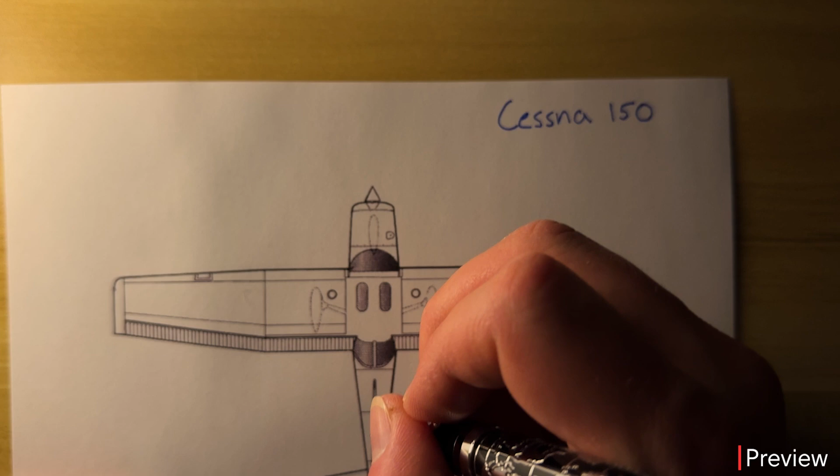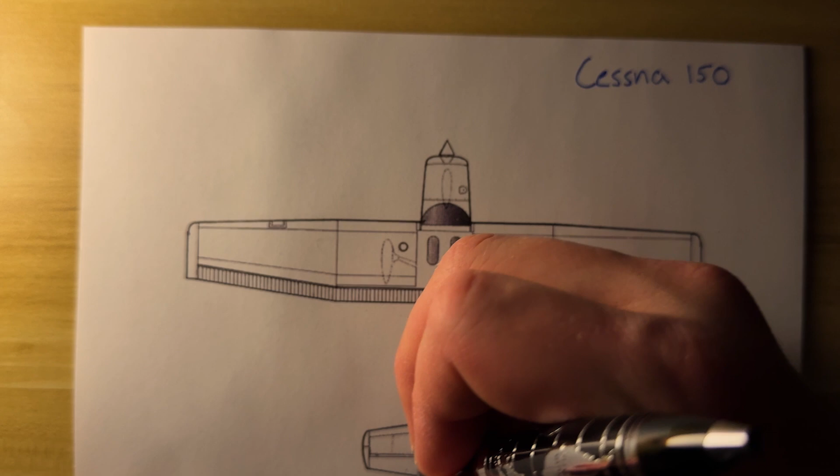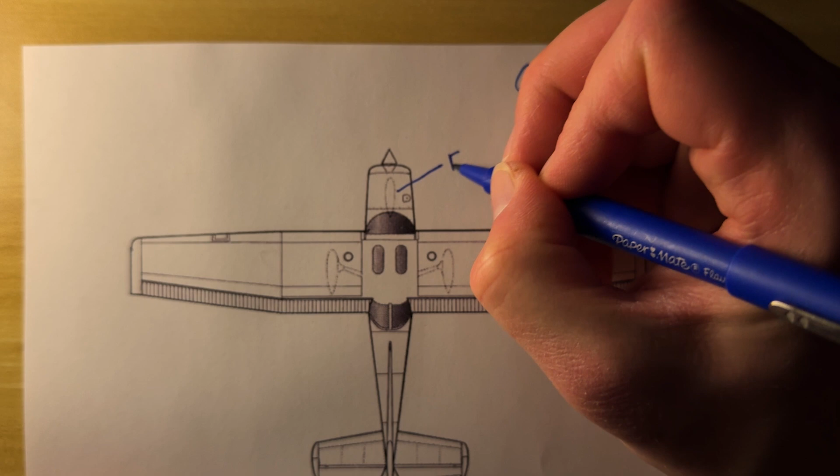So why don't we start labeling some of the main components of this plane right here. Okay, so starting from the top here. So the engine is going to be inside of this compartment right here. You press this little lever down and it will open it up.

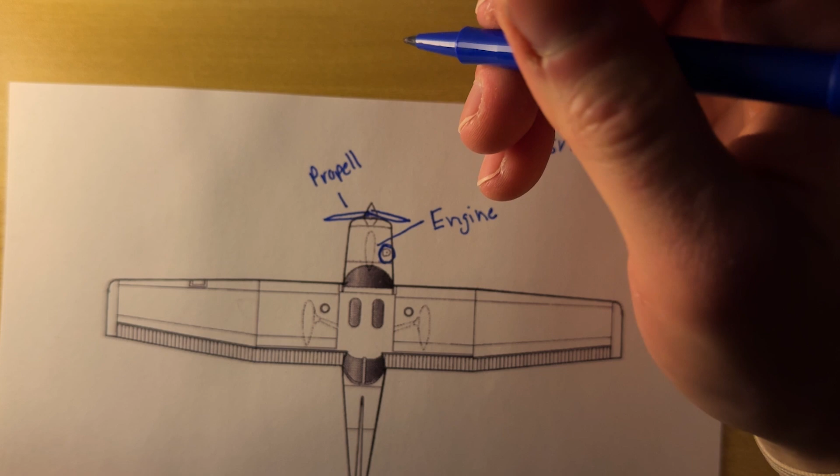And then you have the propeller, which would be on this kind of nose cone right here. So right here, you have the propeller, and I need to make sure that I don't spell anything wrong, because that would be a little embarrassing, not gonna lie. So you have the engine and the propeller.

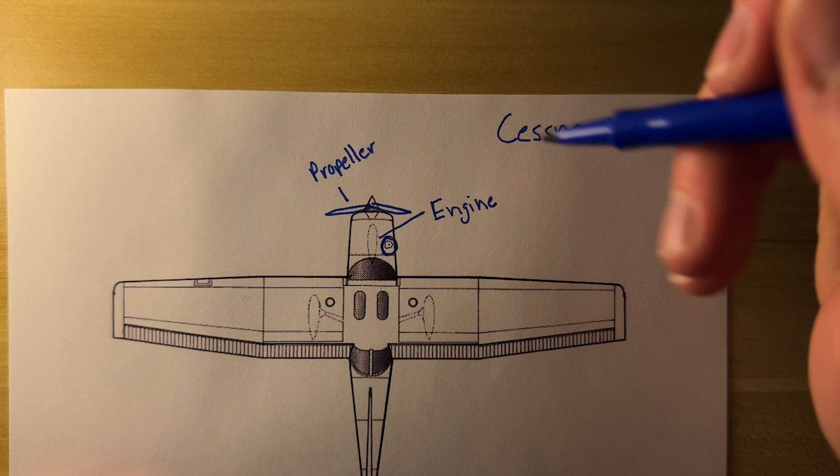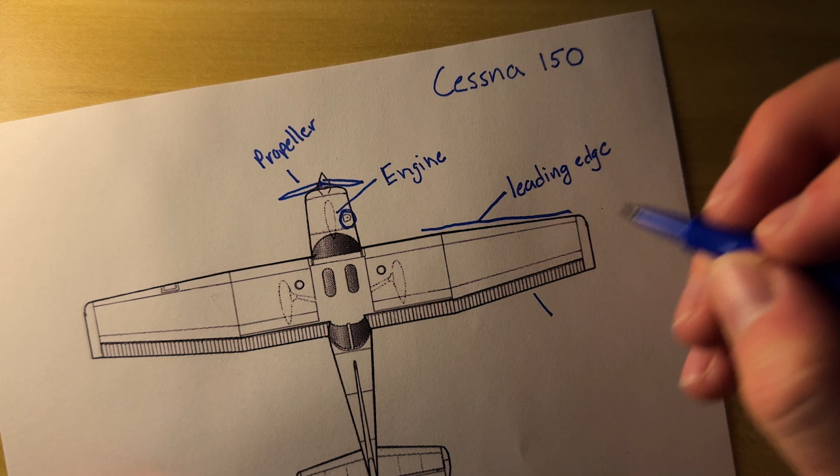And then obviously here are the wings. So you have the leading edge of the wing, which is this front part, that's what it's called. And then on the side here, you're going to have your aileron, A-I-L-E-R-O-N. And this is going to control your side-to-side movement.

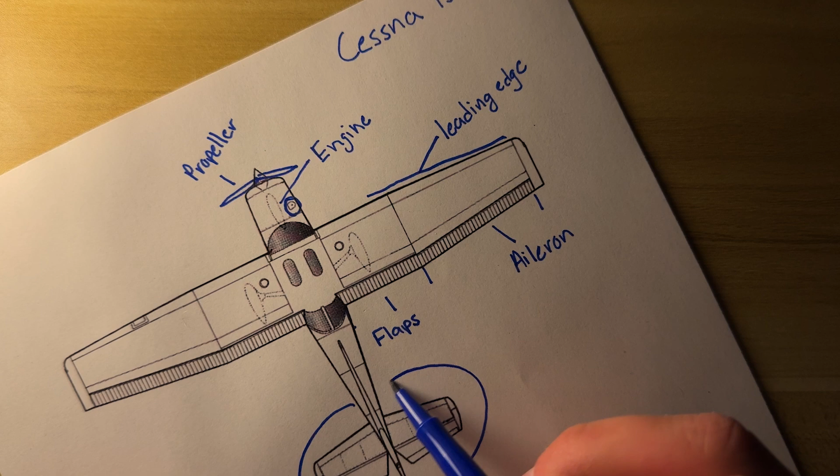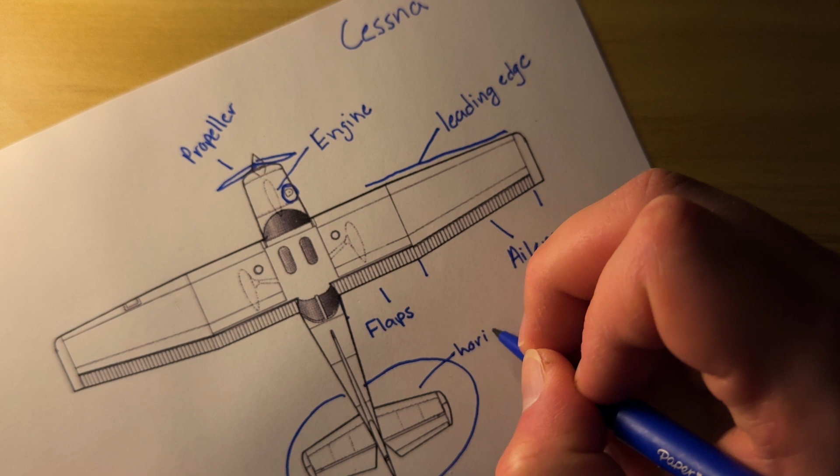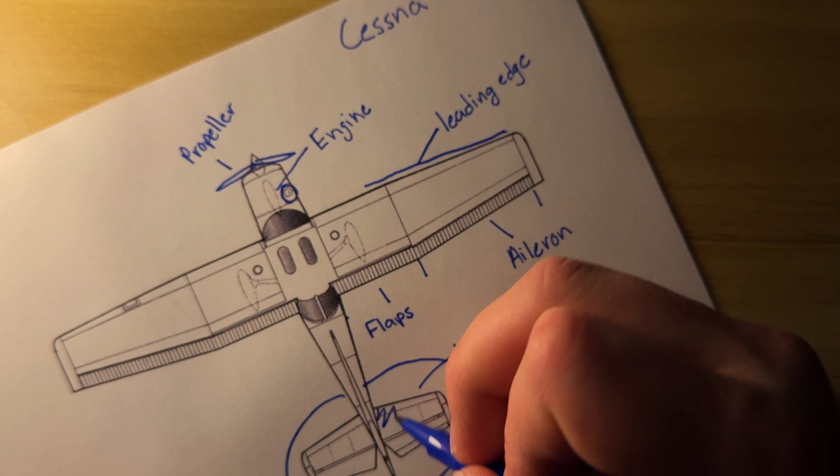And then, so that ends about there. And then right here, you're going to have your flaps. And then at the back here, this part of the assembly. So this part of the assembly is you have the horizontal stabilizer. There's this part right here. And then you have your elevator.

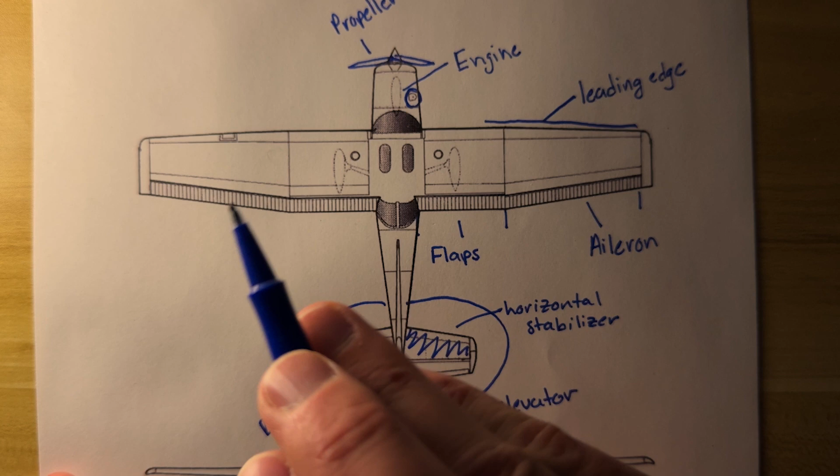Right here, and this controls your pitch, and then it's hard to see right here, but right here is your rudder, R-U-D-D-E-R, and this controls your yaw. Just side to side.

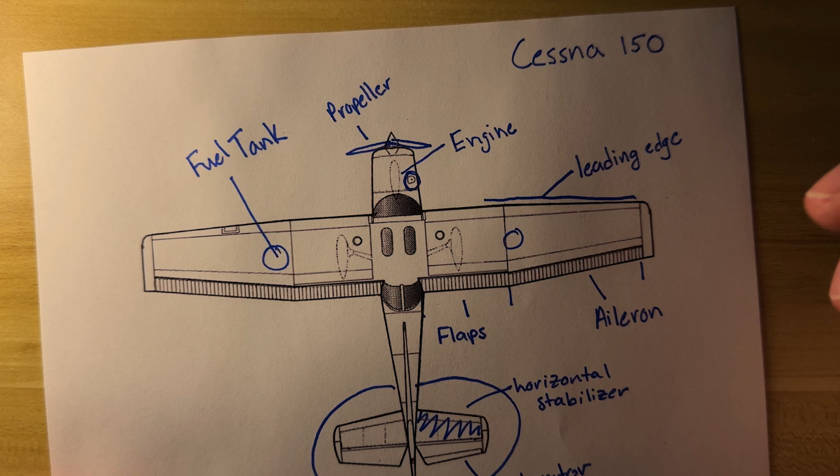Now, the fuel tanks are actually in the wings right here. Fuel tank. So you have one in each side of the wing here. And if I remember correctly, each side holds about 20 gallons. So you have about 40 gallons of fuel here. So from this view, that's about all that we can see.

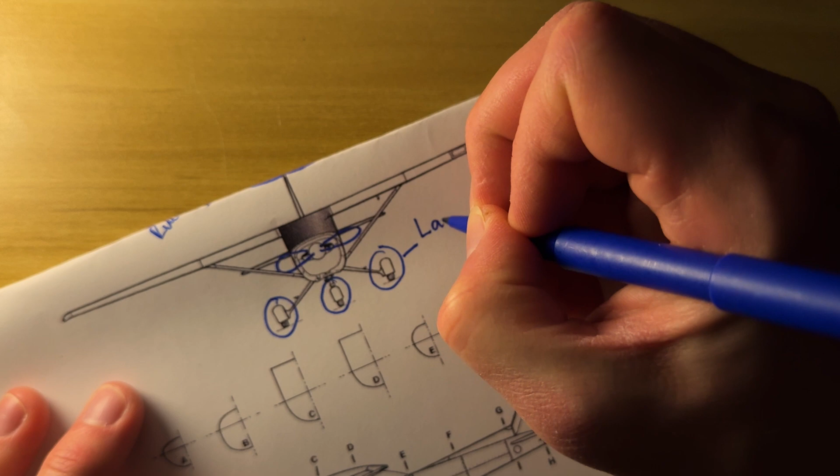Let me just fold this guy up so we have a better view of the other diagram. So here is your side view and your front view. So you have your propellers right here. And then the Cessna 150 has this tricycle gear design. So these are your landing gear. Let's see, and then you have these supports right here that help give stability to the wing.

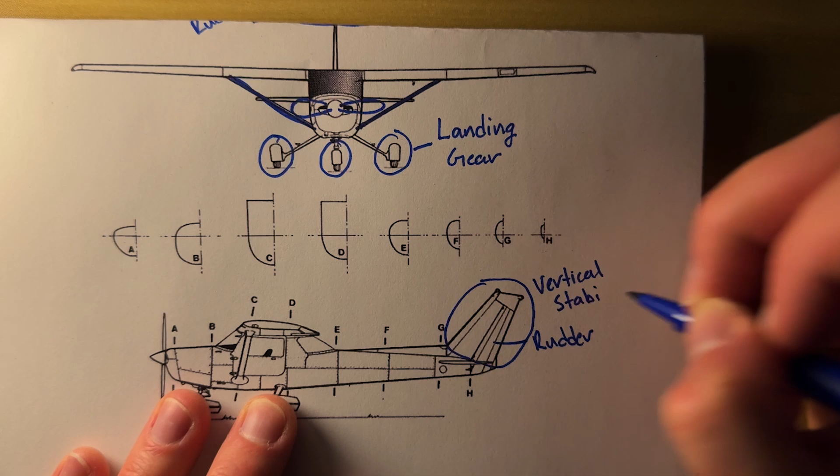And then down here is a side view, so here was a rudder. And this whole assembly right here is the vertical stabilizer. Let's see. And then the main body of the aircraft is the fuselage. I need to make sure I don't spell this wrong. Fuselage. I was definitely going to spell that wrong. So it's fuselage.

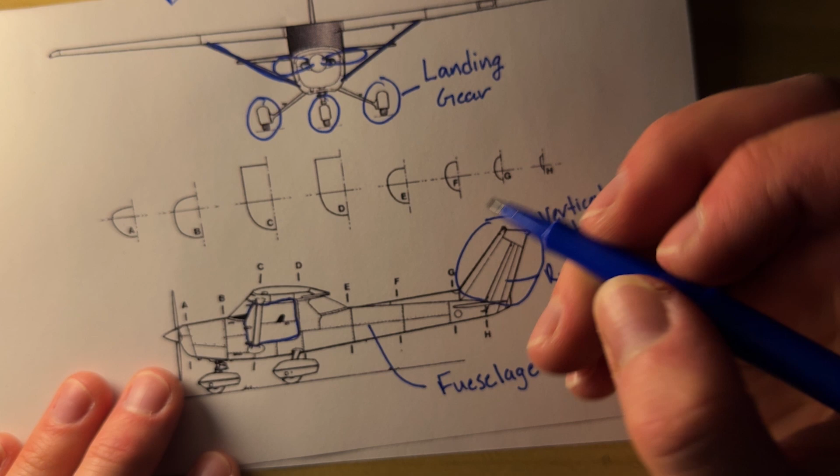So here's a door. Here's a door. Usually there's a little cargo compartment back here, at least on the Cessna 172, where you can put your luggage or whatever else you need back there. Let's see. So yeah, that is the basics of the Cessna 170 or 150.

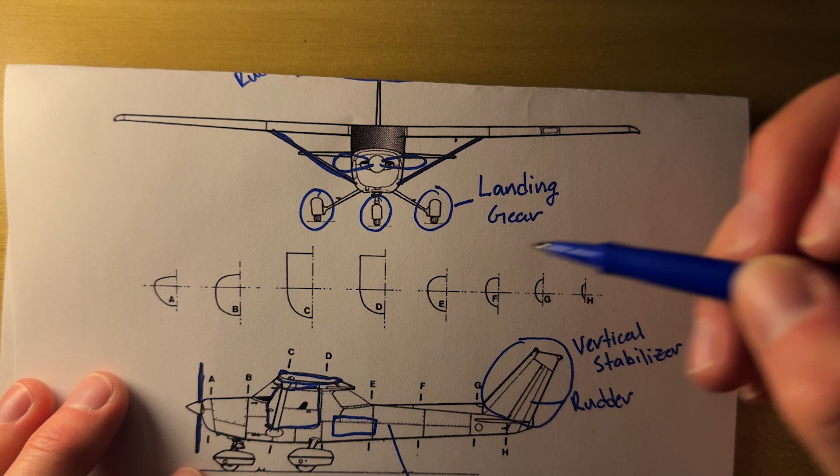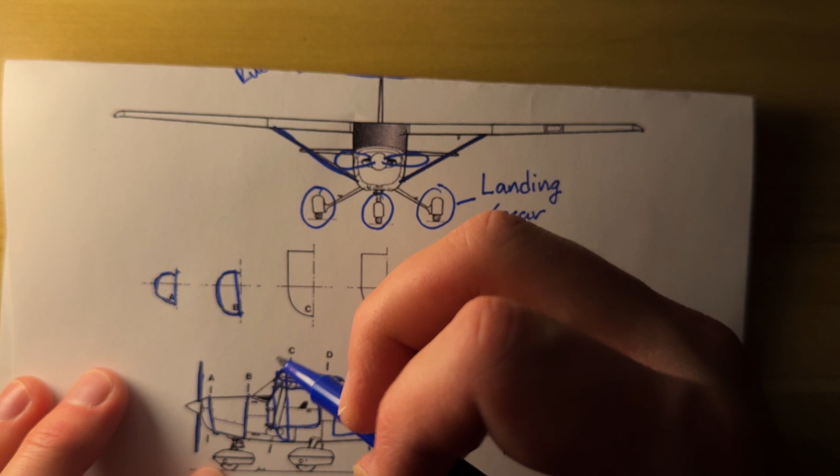And then it looks like right here, whatever this cross section is, it's a cross section of this. So point A looks like this. Point B is a little bit bigger. Then you have point C, which starts going into the cockpit. Point D is kind of like the back seat. And then you get to point E, and that's going to the tail of the aircraft. So the cross sections start getting smaller and smaller.

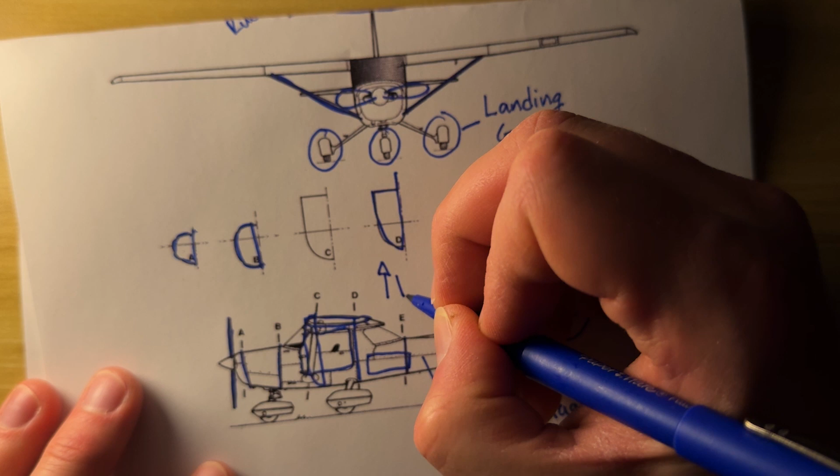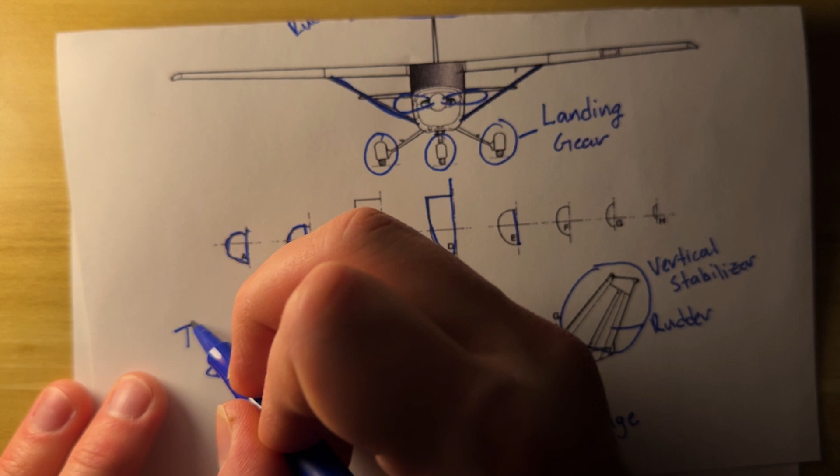So, if we keep looking at this diagram, we can tell the four forces of flight. So, you have your upwards force, which is your lift. Then you have a downwards force, which is your weight. You have a forwards force, which is your thrust. And then you have a backwards force, which is your drag.

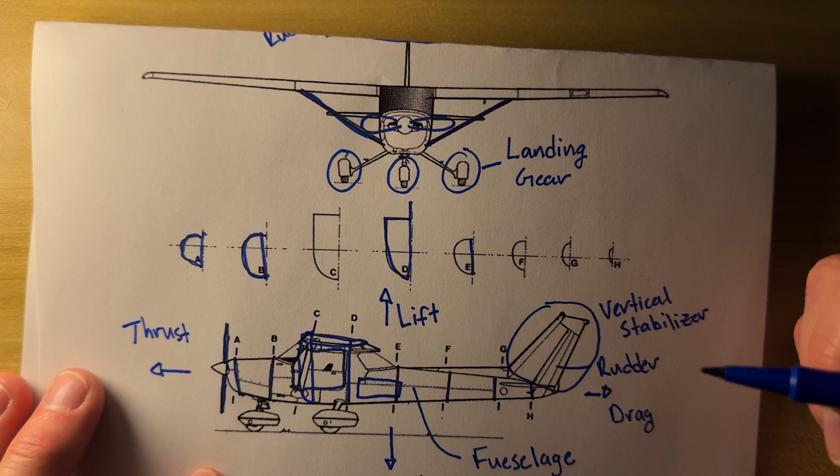Now, in order for this plane to fly, all of these forces must be in equilibrium, or your thrust and lift have to outweigh your weight and drag. So, your force is going to be generated by the engine, which then turns the propeller, giving you thrust.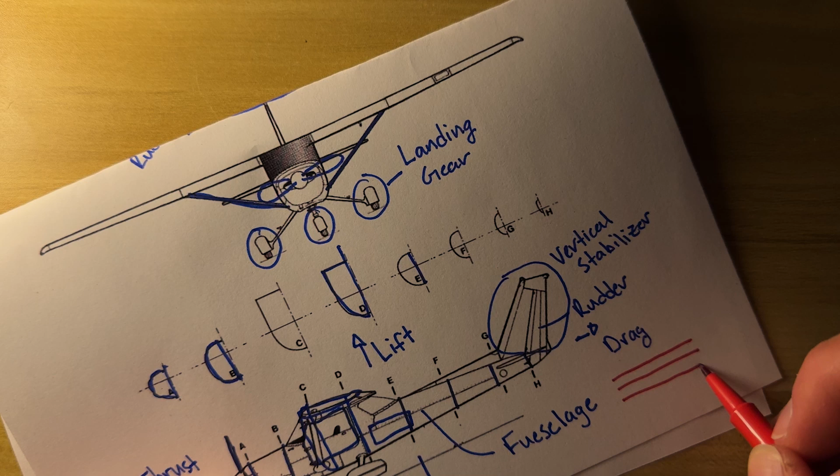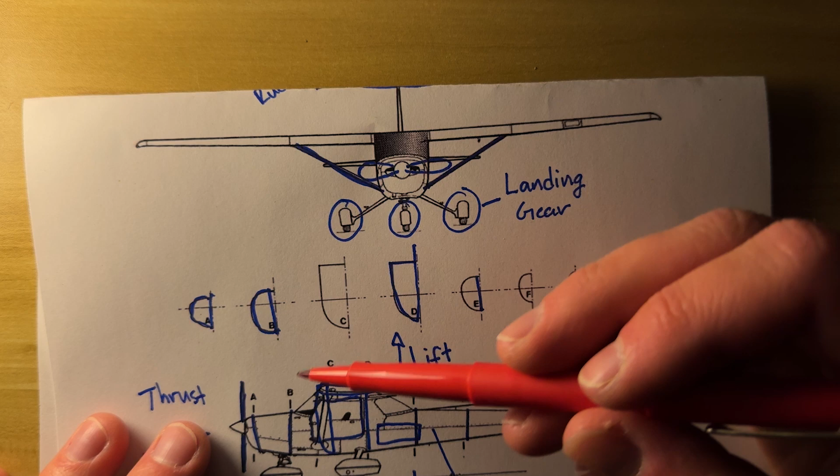Whenever you have drag, which is caused by the airflow over the aircraft, it can go across the fuselage and cause drag, or it can be over the wings. If it's drag caused by the fuselage, then it's called induced drag.

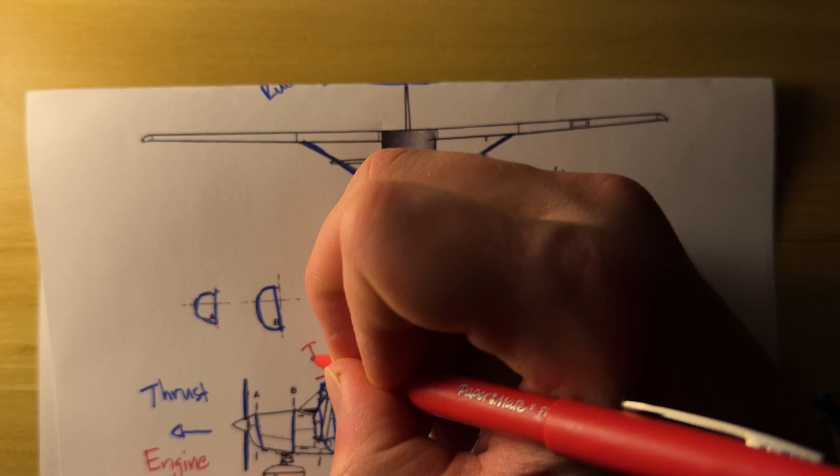Sorry, not induced drag, it is called parasitic drag. But the drag caused by the air going over the wing, that is called induced drag, I believe, if I'm thinking correctly. So those are our horizontal forces. And now we have our vertical forces going up and down.

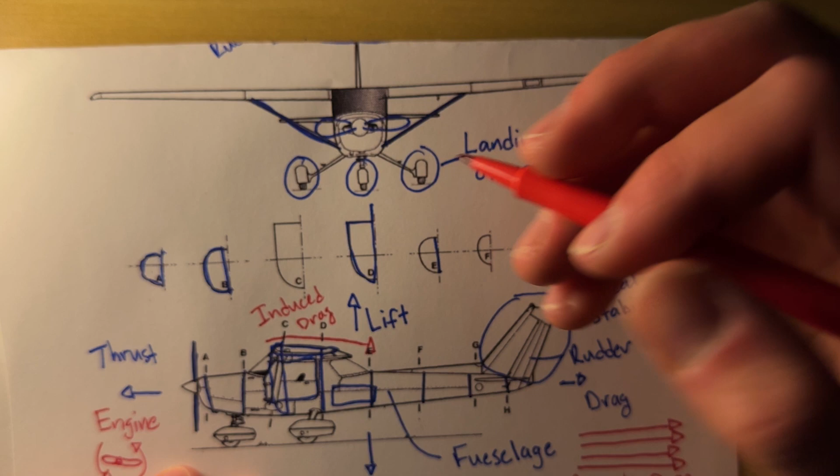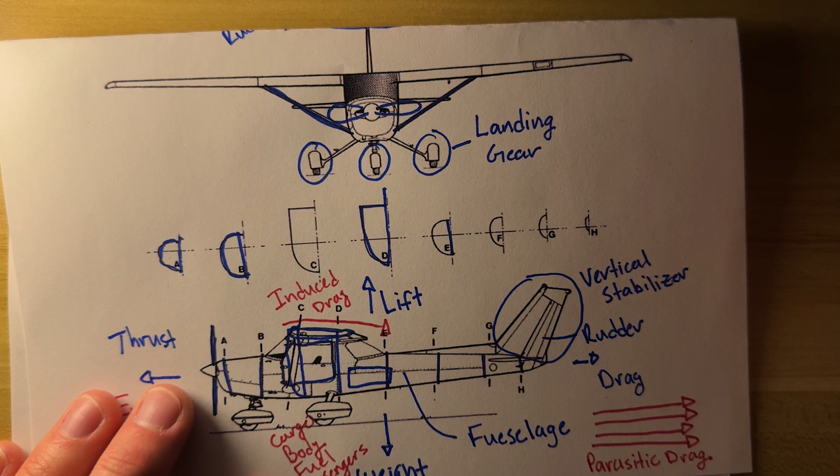So your weight is pretty simple. It's just the weight of the aircraft. So that includes the body, the fuel, the passengers, and any cargo that there may be. And you might know that weight is going to equal your mass times your gravity.

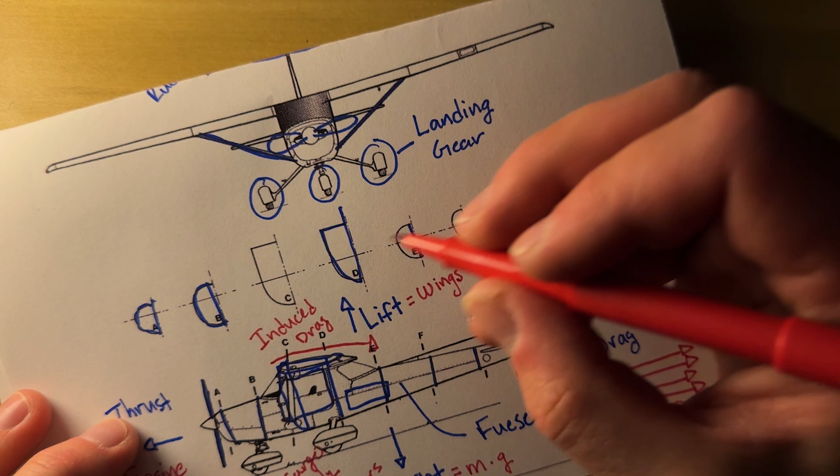And then you have your lift, which the equation for that is a little bit more complicated. I probably won't talk about that. But your lift is generated from your wings. By the air flying over and under the wings, it creates a lifting force, which causes the plane to stay in the air. So let's talk a little bit more about that lifting force.

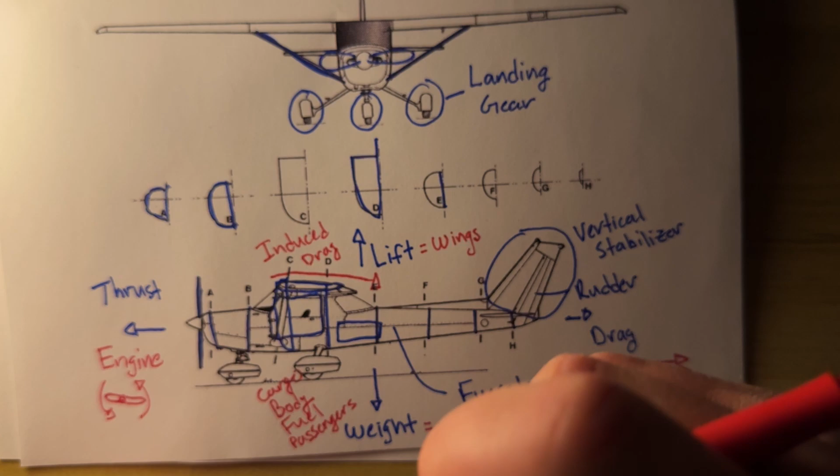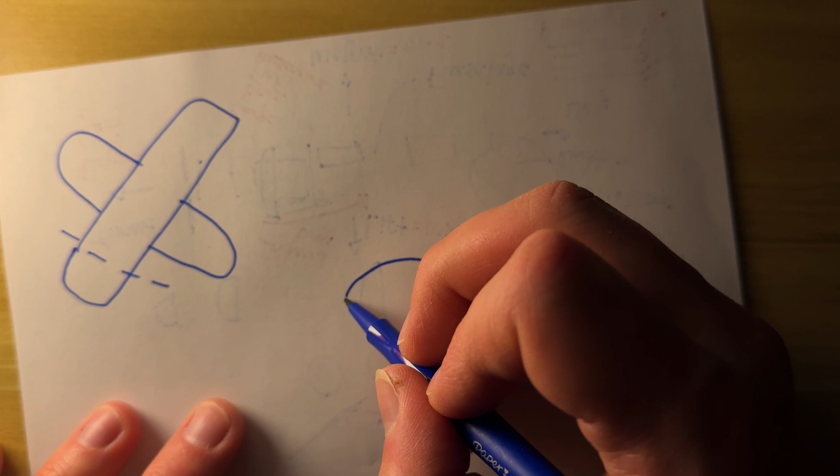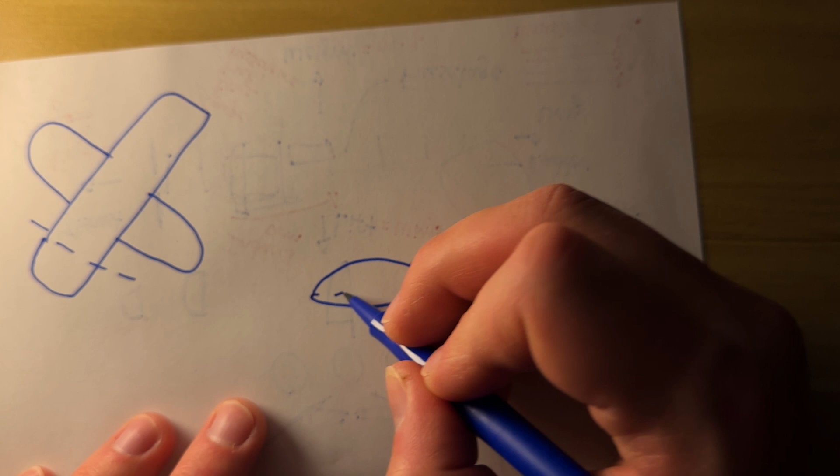So if we imagine the wing of a plane, such as this, and then the plane is something like that. Excuse my drawing skills here. If we take a cross section, something like this, and we look at the cross section, it'll look like some general shape of this. So there are a few things that you can notice here. You can notice that this top half of the wing is much larger in comparison to the bottom half down here.

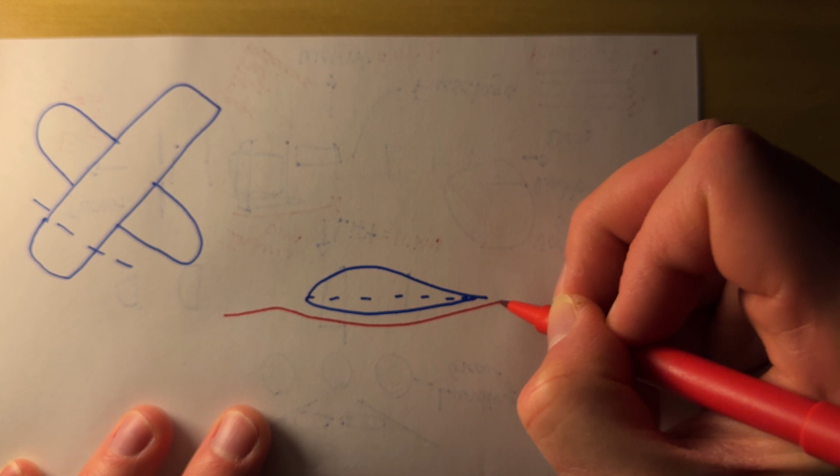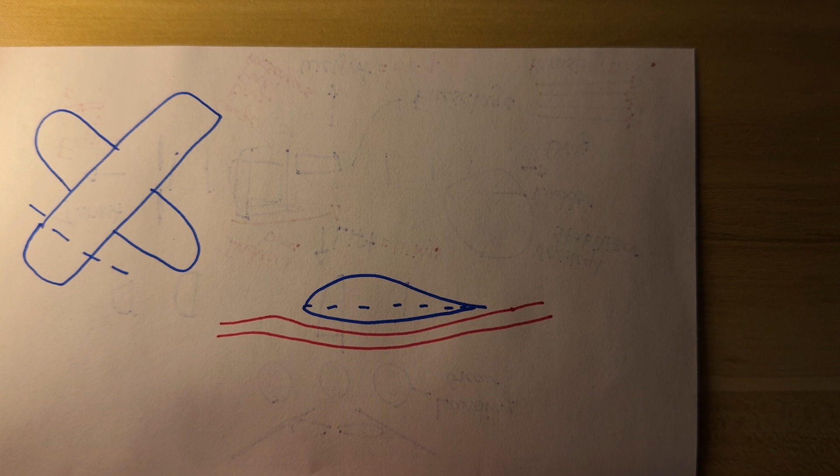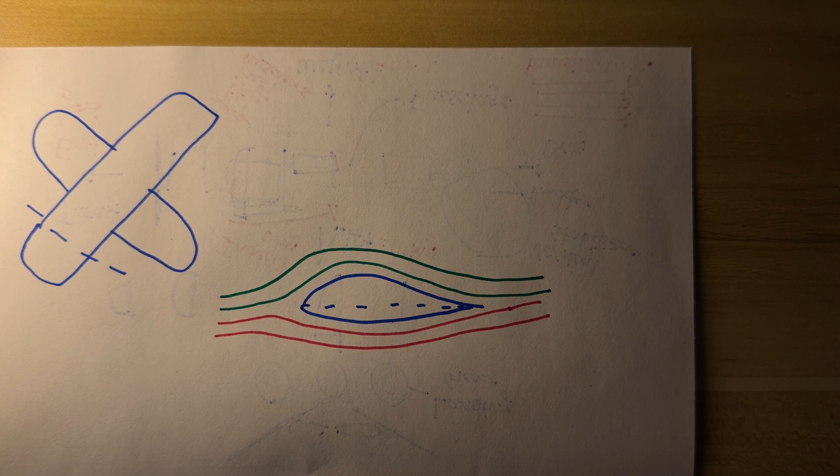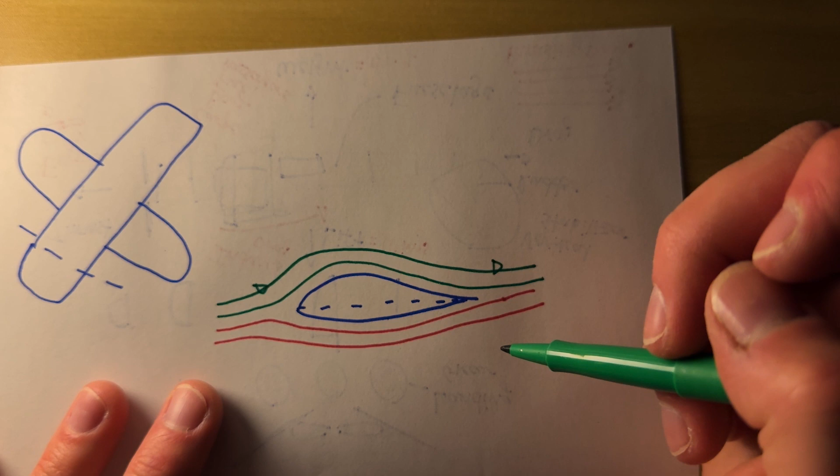So, if we imagine the airflow flowing over the wing, it's gonna look like this. And then this going over the top. So, as the air moves over or through the wing, it ends up getting split, going over the top and the bottom. So, if you imagine a point here and here, both of these points want to reach the back of the wing at the same time.

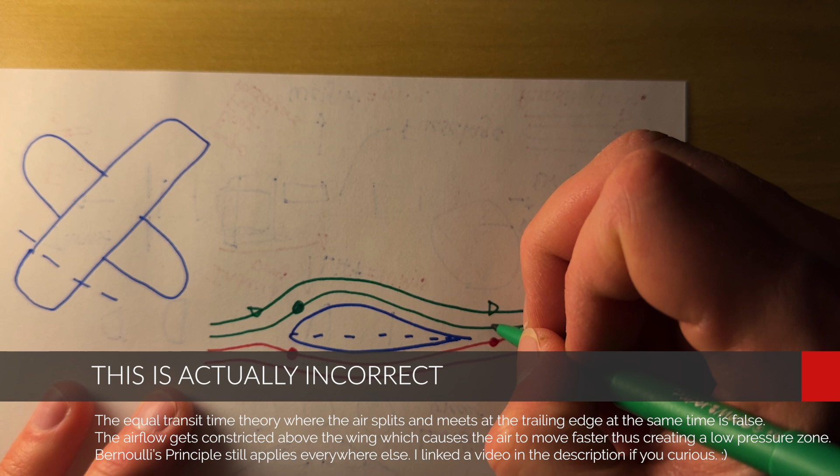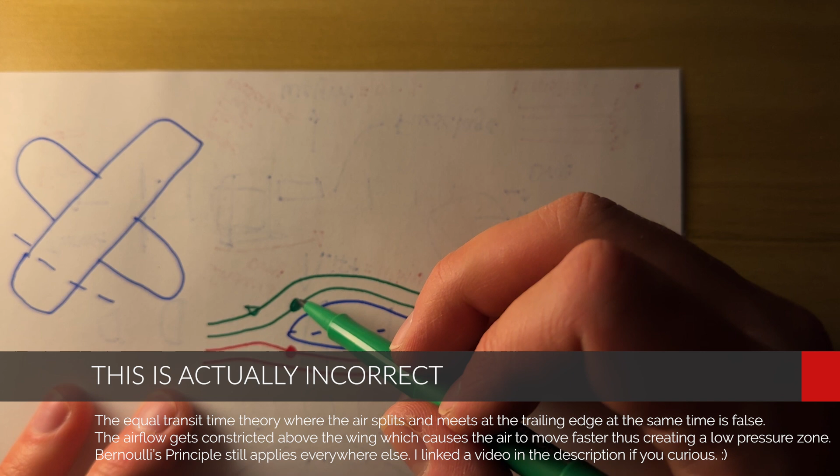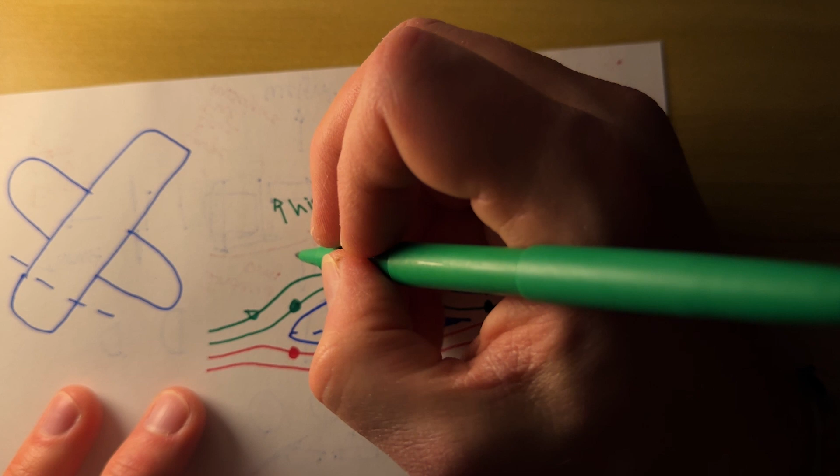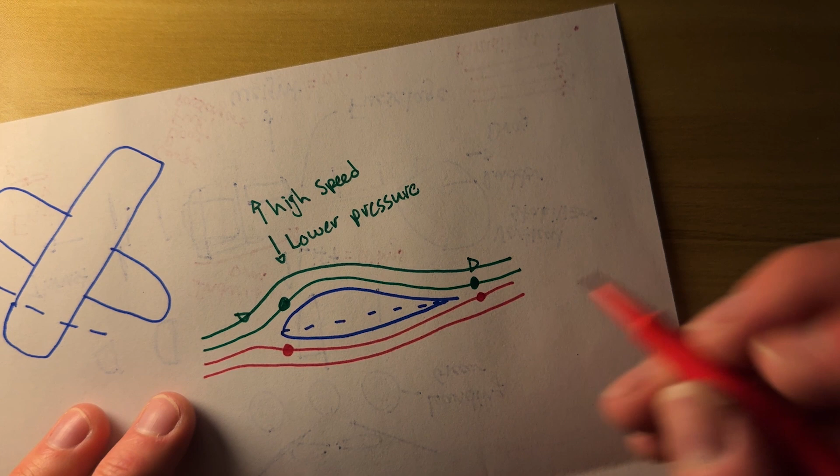So what does that exactly mean for it to do this? So that means that this point needs to travel a further distance to get here than at the bottom. So you're going to have a higher speed, but a lower overall pressure in this top zone. But in the bottom zone, the air doesn't have to move as fast to get to the back of the wing. So you're going to have a lower speed, but a higher pressure.

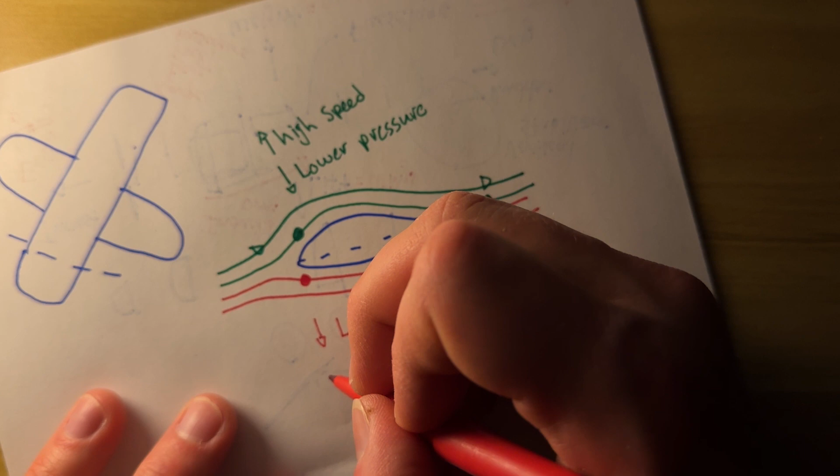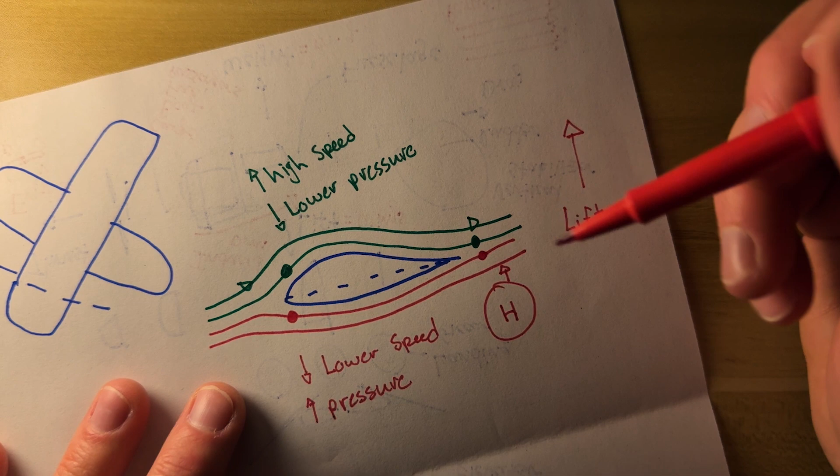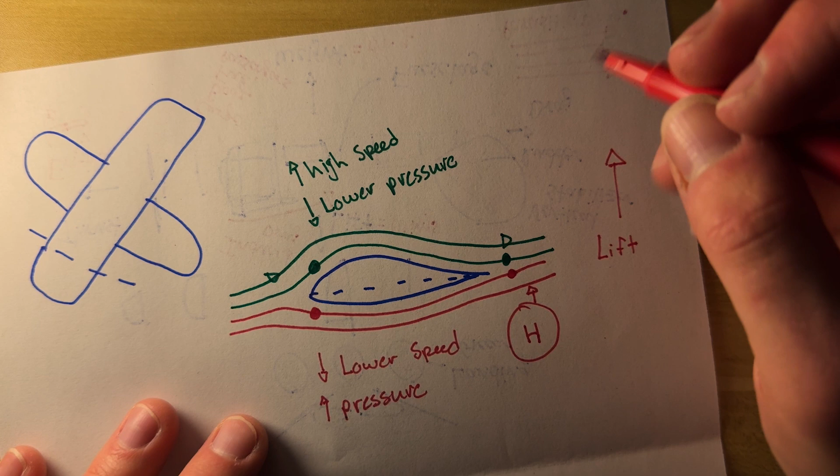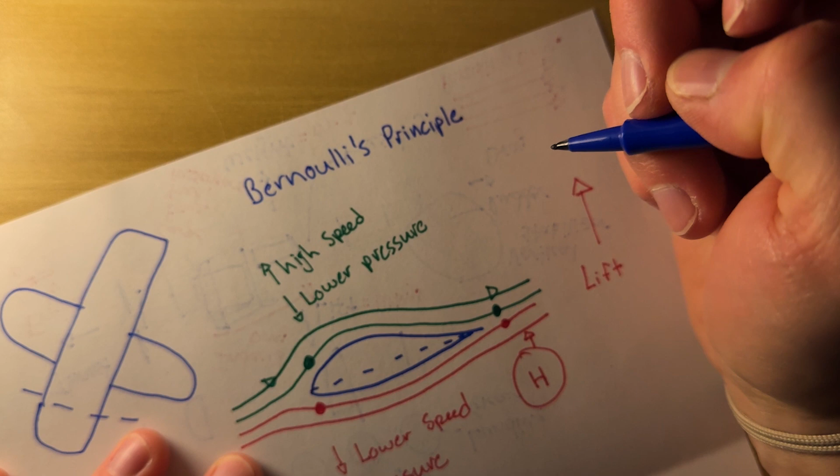And really, what generates this lift is this pressure difference. So you're going to have your high pressure push up on the wing here, because the pressure always wants to kind of equal out. It wants to be in a state of equilibrium. So in order to do that, it must push up on the wing, to try to maintain that equilibrium, which ends up causing your lift here. And this is known as Bernoulli's principle. So that is kind of the basic concept of an airplane's lift.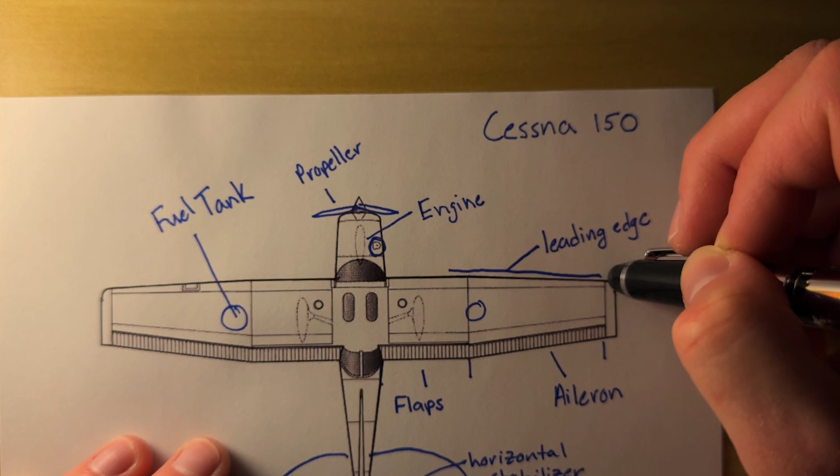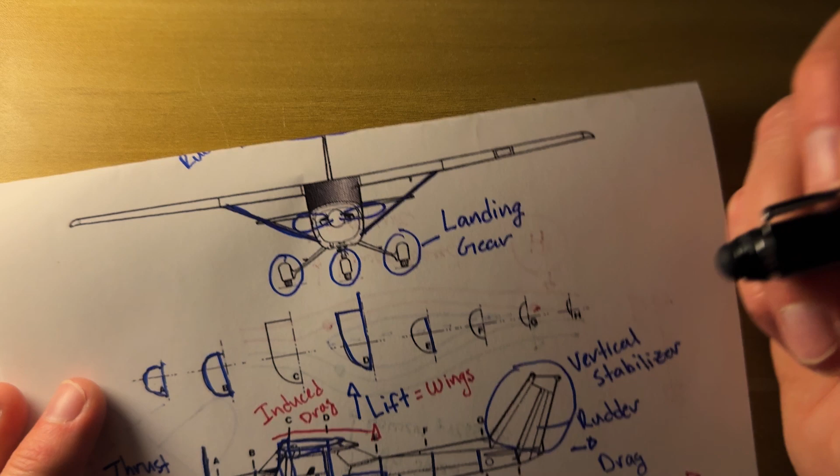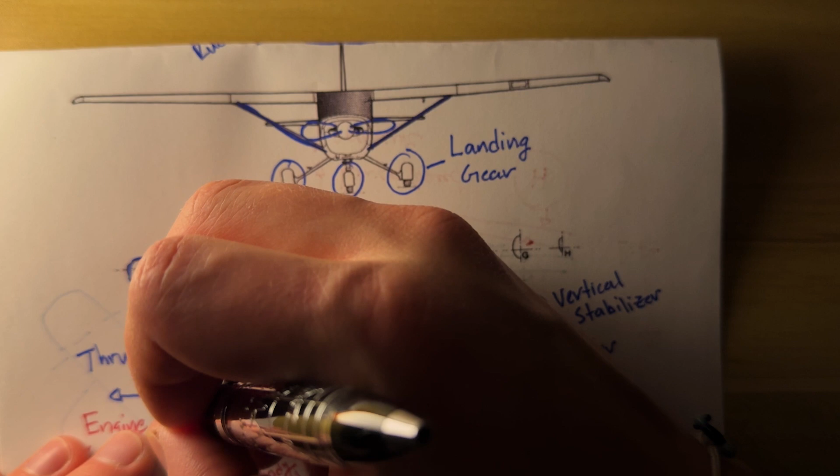So I think that about wraps up this video. There's a little bit of me nerding out about planes, and I know that there are a lot of aviation people out there, so I apologize if I said anything wrong or forgot anything. If I did, feel free to let me know in the comments. But I hope that you enjoyed this more of a laid back, semi-soft spoken video of me just talking and tracing.